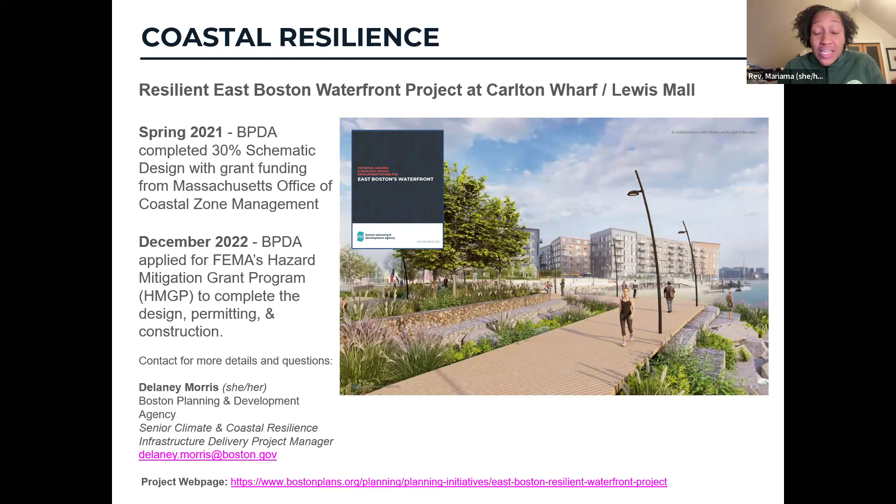So I think you saw from that diagram, this is an area that is of critical importance to protecting a significant portion of East Boston. The reality is that the water that comes in along these three potential entry points has the potential to flood folks significantly inland from the coast. So it's pretty important. You also heard people lay out specific steps that we're trying to take and the work that we're trying to do.

We want to name a couple of decisions that have been made and a couple of decisions that are outstanding. We've had significant conversations with Massport, and I think we have come to an understanding of what needs to happen. I want to be transparent that we have not fully locked down all of those decisions at the level we might want to assure that there's full alignment. And so we want to be transparent about that, because it affects another decision that we've also made.

As was noted, we want to get to the point where we are not using deployables as a way to protect people. They are a great interim solution because they make sure that for a relatively low amount of money, we are able to protect people, but without building, for instance, a large wall or doing something that would be drastic in such a way that we take away possible amenities and access during the times when there's no flooding potential.

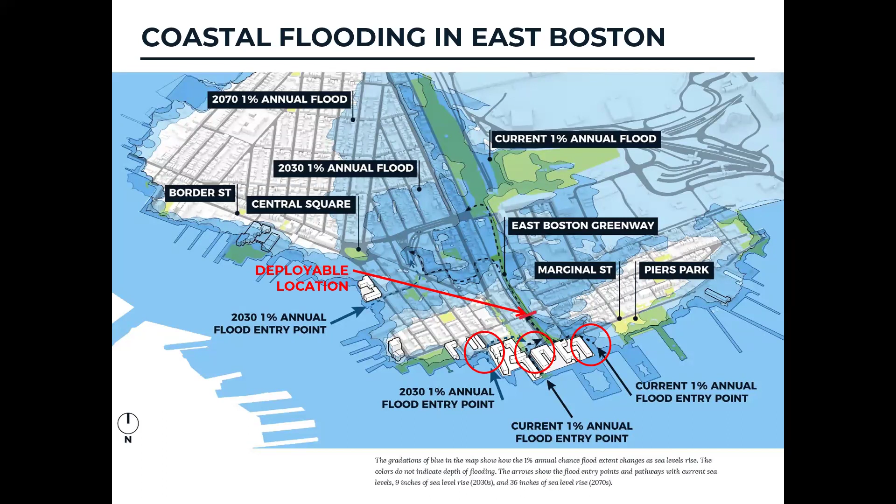Okay, thank you. My other question was about stormwater management. The Greenway for most of the winter is flooded. Right now it's like a mud pit. And it's because there's acres of parking lot owned by the health center, and that stormwater is not managed on their property. So it all just flows into the Greenway and washes out all the dirt, trash, mulch, leaves, and everything else. So is there anything that can be done about that?

The health center, we'll talk there. I think there's some space to talk about some things. I think there's some things we can fix and some things that are a little bit more challenging, but Amy's going to bring that in because we think that fits squarely within the park design process, and we do have some options there.

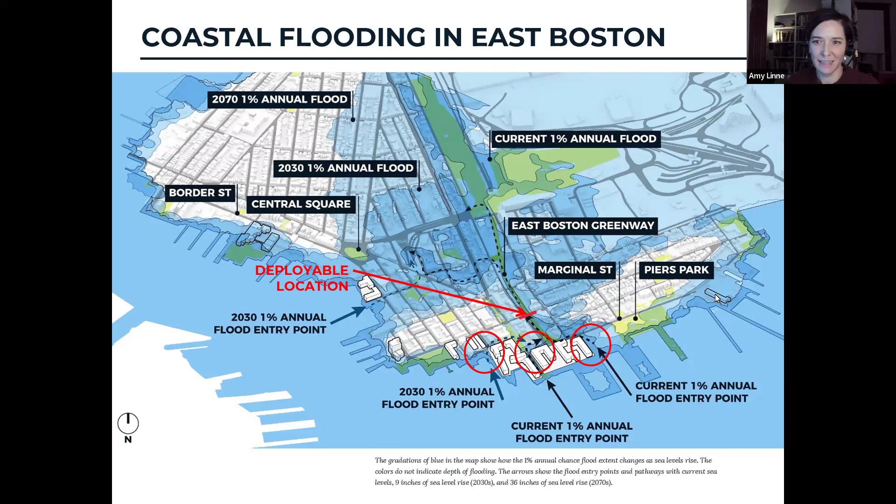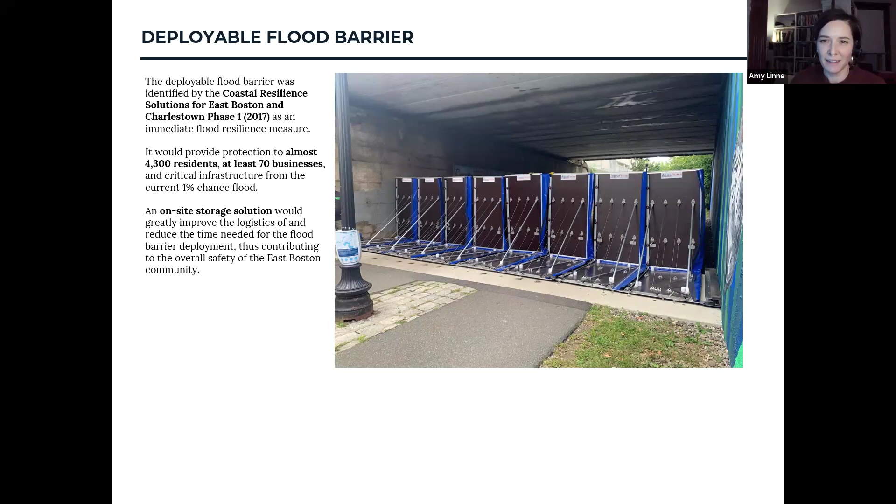Farah, do you want to go to the next slide? So this does just provide a little more information on the deployable flood barrier, what that looks like, and the benefits it does provide when deployed. And because it is something that the parks maintenance crew will put into place, we've been working with them on providing a storage location. Next slide, Farah.

So we expect it will look something like this. Ideally, there's maybe an opportunity to paint or wrap it with something more decorative. The location we're still studying because we're trying to strike a balance between proximity to the underpass at Sumner Street and not blocking views for people on the Greenway, sight lines impacting that. So I think it'll be a little bit more investigation, and then we can certainly give everyone an update at the next meeting.

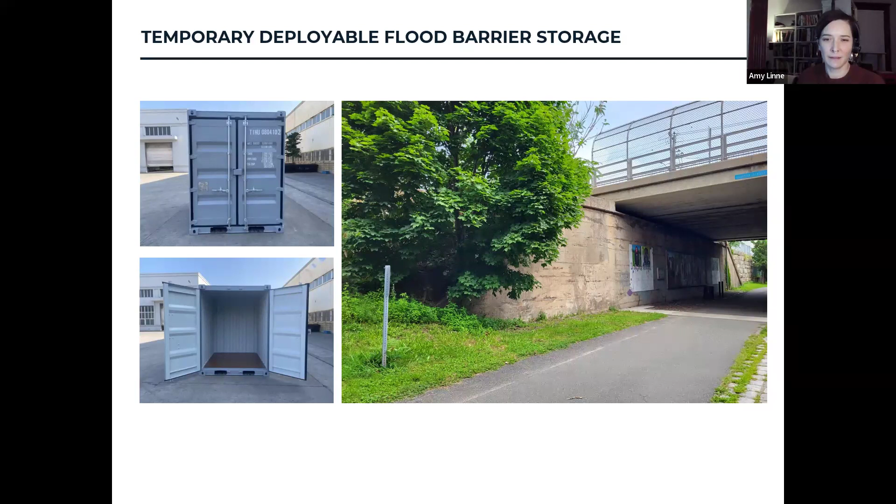Okay, so we actually did those questions and comments, so we can go ahead to the next slide.

And we can now focus on the Greenway project. So I will turn it briefly over to Commissioner Woods to say a few things.

Thanks, Amy. It's great to be on here tonight. We have just about 50 people on here, and it's great to see some familiar faces with Sal and Valerie and Karen and Vidya, Michelle, Bill Masterson, people that we've been working with for decades on East Boston projects, and more specifically at the Mary Ellen Welch Greenway.

I want to thank the friends of the Mary Ellen Welch Greenway for all your advocacy and work. I had the opportunity at the end of last year to meet Elizabeth and walk some of the site with her and hear some of the exciting things the friends are looking into and want to work on as we move forward. But I want to thank you for the dedication. I mean, so many people use this Greenway on a daily basis, whether it's traversing to work, for respite, recreation. And I know I used to always hear from the senator when she was cutting through all the time. I always got updates on where the water levels were, if the pumps were working, if they weren't working. So it was great to always hear that.

We worked on repainting the caboose this year. We got a lot of the art project that was on there scraped off and repainted. And we're continuing to work with Troy, who's trying to open a small business there. There was actually a call today with Water and Sewer about the proper way to hook things up.

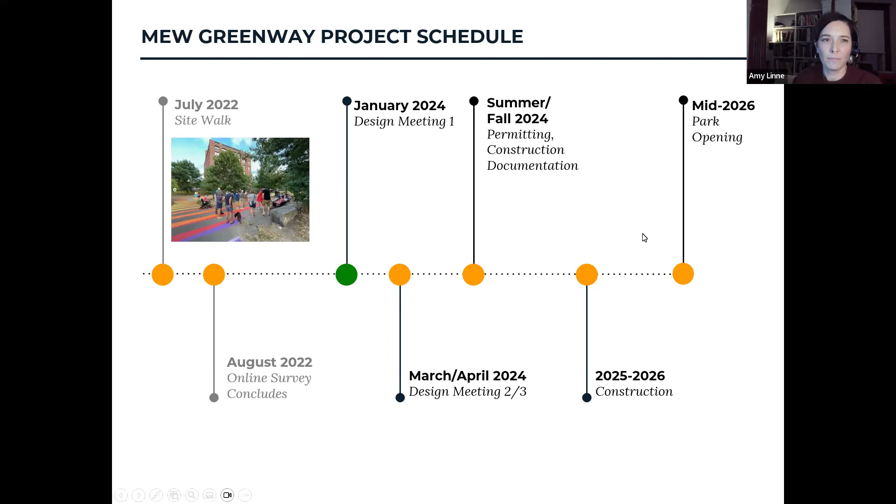So for this meeting, our goals are really to re-engage with the community on the project, discuss strategies for ensuring the Greenway is usable during and after storm events, discuss design concepts for a new path alignment and Greenway amenities, and then gather some updated input on how the community uses the Greenway and how they would like to see it used in the future.

This is just a quick overview of our project approach. For designing public parks, we include community input, such as this meeting tonight, safety guidelines and regulatory guidelines, such as ADA, the City of Boston priorities, and the Parks and Recreation goals. And with that, I will turn it over to Farah from Weston and Sampson.

It's really great to see lots of people on here tonight, and just a really exciting project that, as Amy mentioned, we had done a site walk back in July 2022.

At the same time as that site walk, we also launched an online survey. What we're showing here tonight is only a snippet of the questions that we gathered and the information that we asked during that online survey. The survey was up for about a month, and we got about 80 responses, or just under 80 responses, and really great enthusiasm to see improvements to the Greenway.

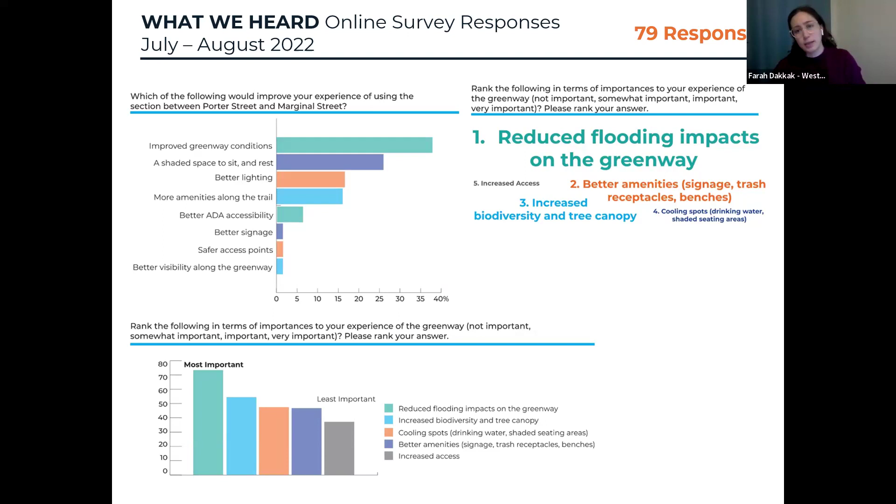And obviously at the very end, we'll have an open discussion just like we just did, and you can unmute yourself and talk to us about your thoughts.

Yep, great, QR code made it easy. That's good, it's good to see lots of people. We've captured about 15 people, so I'll give it an extra couple of minutes for folks to jump on there.

As an overview for the rest of the presentation, I'll be covering existing conditions, and then dial into some more specific site observations. And then we'll talk about what we envision, or our ideas, for the Greenway. And then we'll want feedback from folks on the call to weigh in on that as well.

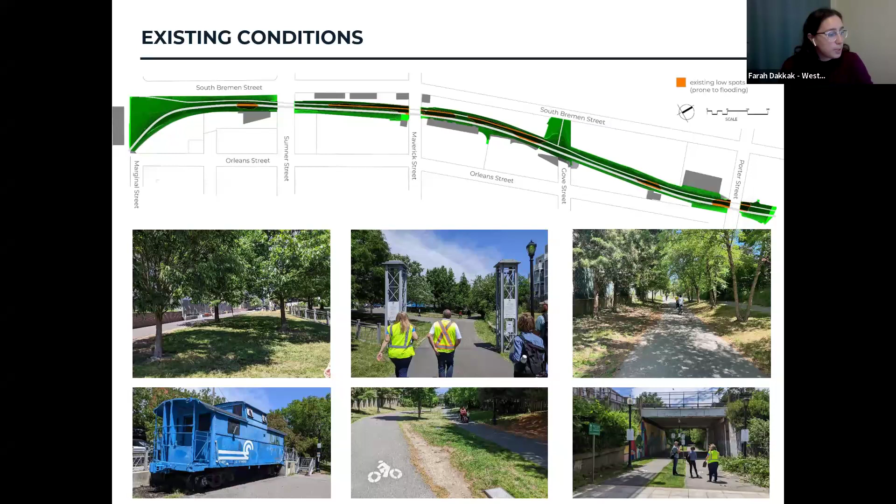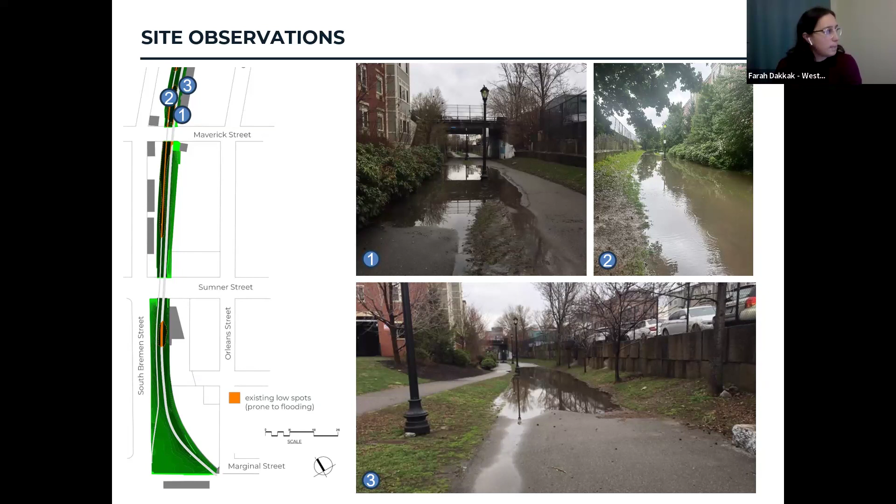In the next two slides, we'll look at a few site observations we made that include the ponding and extensive water we're seeing on site. These are a few images of observations, some sent to us by friends groups and other folks in the community, and then a few more images of flooding and extensive water ponding along the Greenway, as well as site observations.

We've noted some erosion along the slopes of the Greenway, and as we work through the design, we'll think through how to treat those areas and how to mitigate some of that erosion along the sides.

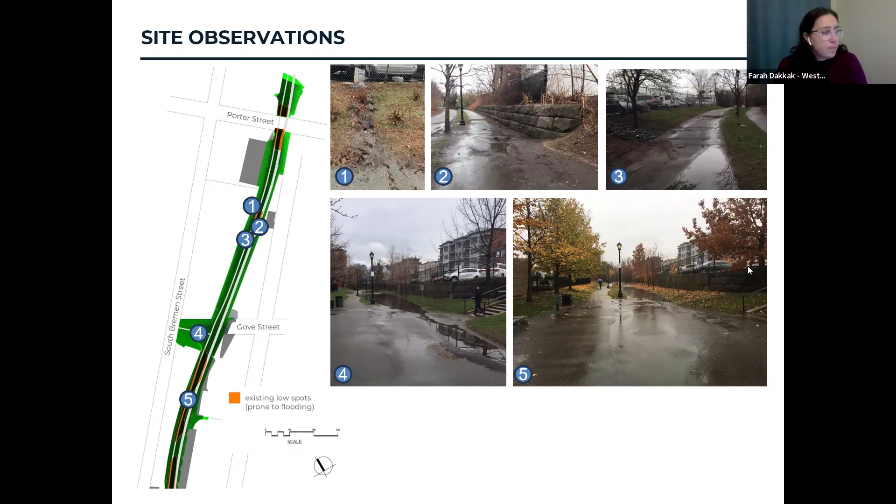Next slide, so the causes for these flooding impacts. In the past couple of slides, I've covered the existing condition and observations on the site that many of you are aware of, and we want to dial into why these on-site conditions are being observed.

Several factors cause flooding conditions. Those include the high water table, drainage pipes, and tidal conditions, the low elevation of the Greenway being one of the lowest spots in East Boston, as well as the impervious surfaces along the Greenway. There are quite a few buildings and parking lots that contribute to the overflow of water into the site from all sides.

We're acknowledging that the solution to these issues will require coordination between the city as well as Boston Water and Sewer. The goal would always be to build a robust green infrastructure network that addresses these concerns.

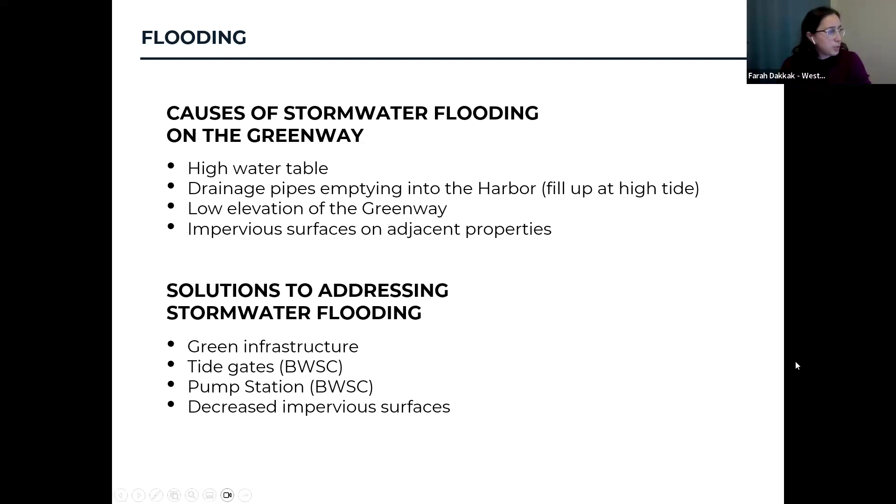The following two pages will show what I just described, but in a more diagrammatic way. Water comes down these slopes and usually heads towards a drainage point, and water's coming from many sides. Sometimes when there's too much water coming down the slopes or from adjacent properties, it overwhelms the site infrastructure that exists out there.

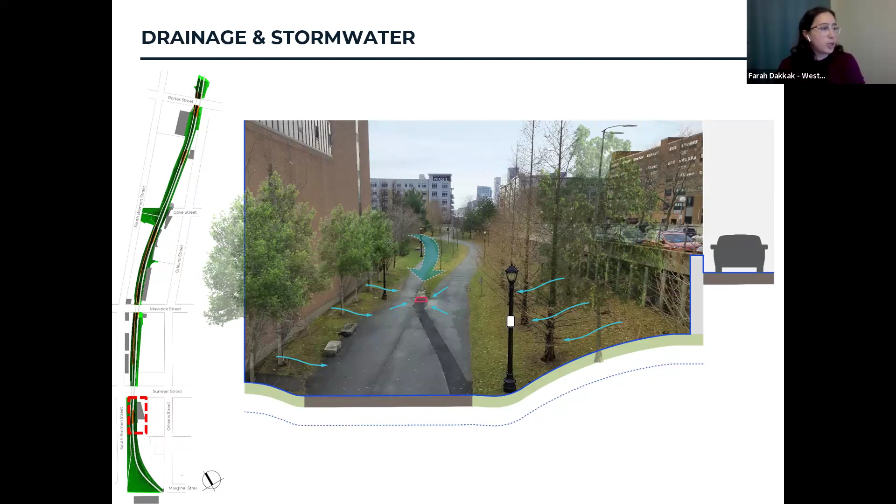Our charge and our project would be interested in finding ways to mitigate those on-site conditions. A similar condition here: slopes, and then drainage that maybe wasn't designed to carry as much water as it's receiving. We'd be looking at how to improve these conditions and ways to mitigate that.

What's interesting here is you see certain moments where there's an elevational difference between the two paths. We think that could be one way to capitalize on what exists out there and strengthen that condition. You can see a moment where the site might be flooded, and one pathway that's lower may not be as accessible, but the elevated pathway would be. That's one condition we noticed on site and are thinking through how to incorporate into our designs as we move forward.

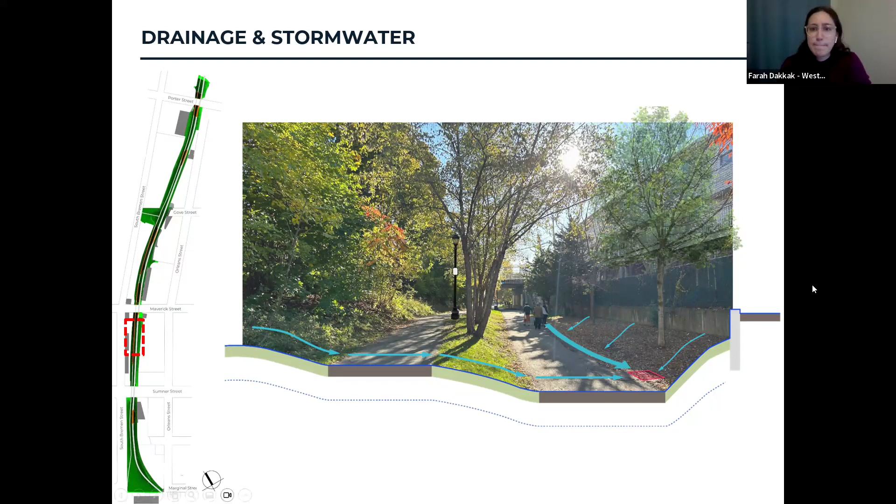Amy, feel free to jump in if you've got anything to add so far. Great.

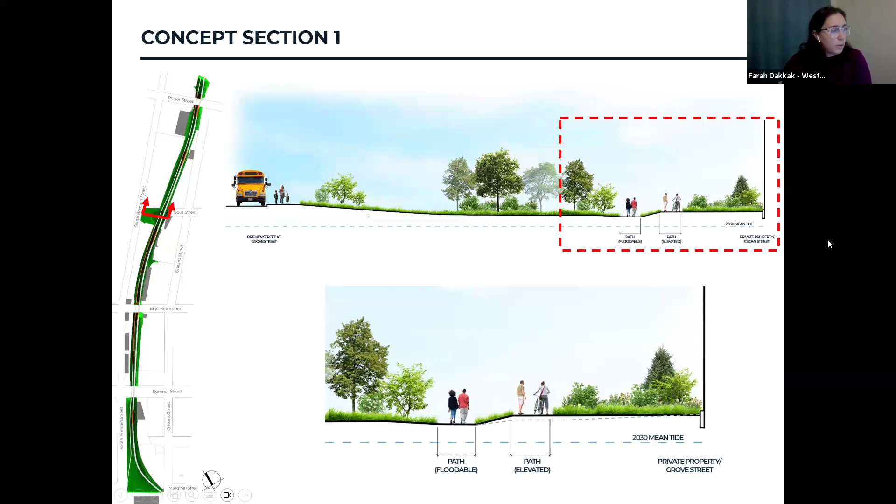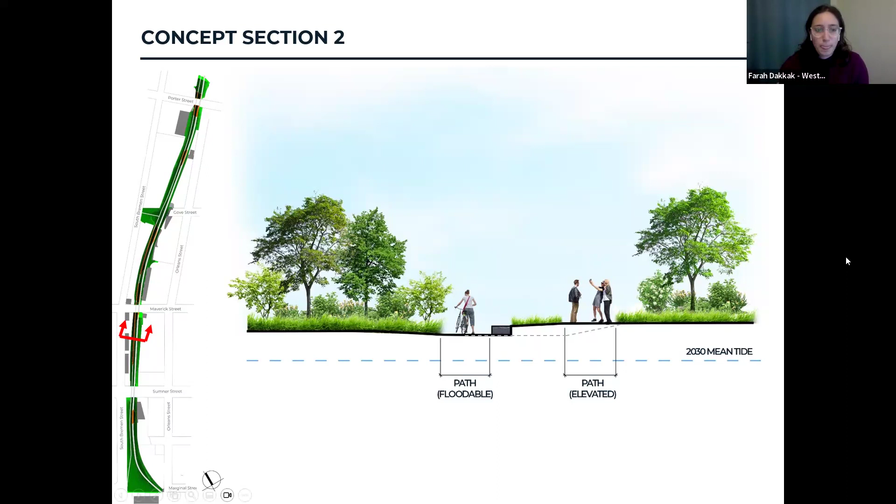And then the third concept, which I'll ask folks to specifically weigh in on, is consolidating the two paths—your bike and your walking path—into one wider path that's slightly elevated as well. Combining the paths would decrease the amount of impervious surface, as well as perhaps give more space for planting in some areas, which would also help with absorbing flooding.

So that's a completely different approach to the Greenway, and we realize that might raise some red flags for some folks. So we want to hear whether this idea is viable. Do people think it's reasonable to consolidate the paths, or are two separate paths—one for walking and one for biking—the way to go, since that's how it's always been done? Hearing from folks at the end would be great, just to know if this is a non-starter or if we should explore it some more.

Just noting, as somebody who uses the Southwest corridor and bikes through it, there's always people walking on the bike path and people biking on the trail. I think we've heard a similar comment about the Greenway, so we're trying to tease out what folks in the community think about that.

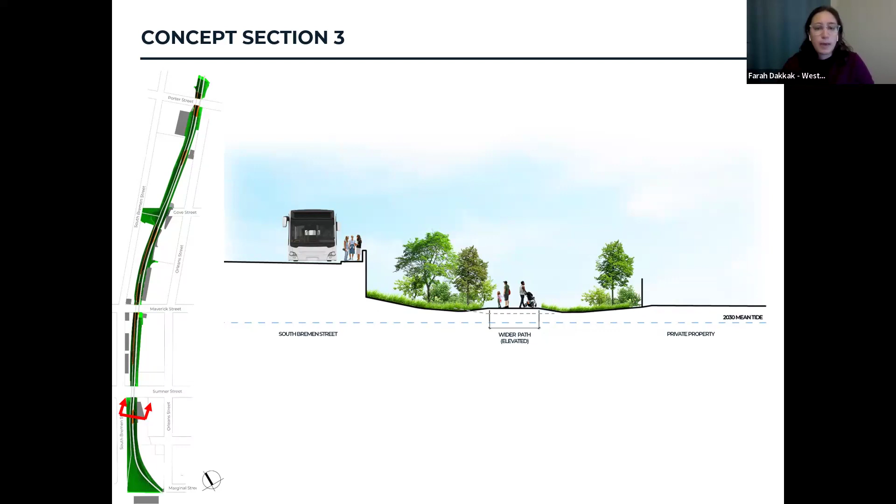I see many comments coming in the chat. I'll read some of them out as I work through the presentation.

And then the last slide I have here is about site furnishing and planting images. These are just things that we'd look to improve, in addition to, I saw some comments about lighting, and we're definitely looking into how that can be improved and strengthened through the work that we do.

Amy, is there anything you'd like to add? Otherwise I have three or four more Slido questions, and then we'll open it up for discussion.

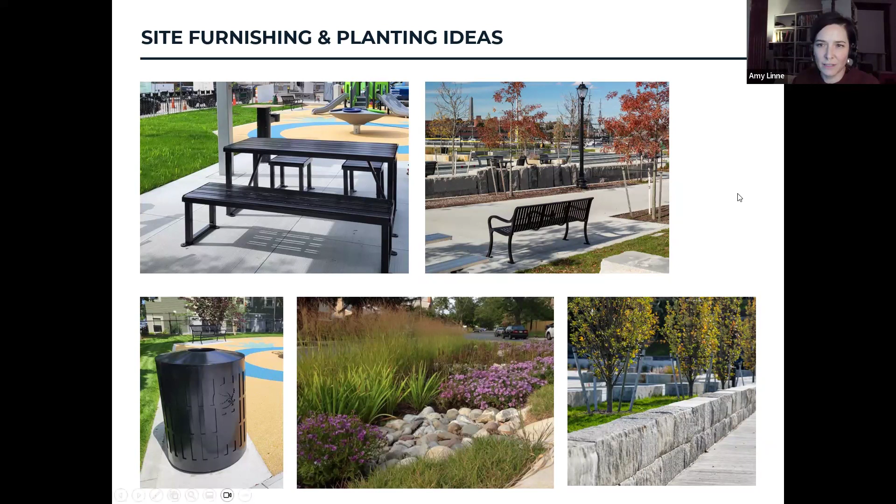So if you want to go through the last few Slidos, and then we can go through some of the chat comments, that'd be great. So, what amenities would you most like to see at the Greenway? Benches, lighting upgrades, signage, native planting, picnic tables, walking space, bike space, performance space, outdoor classroom. Quite a lot of options there, and I believe you can vote for multiples, or at least that's the hope — that's how it should have been set up.